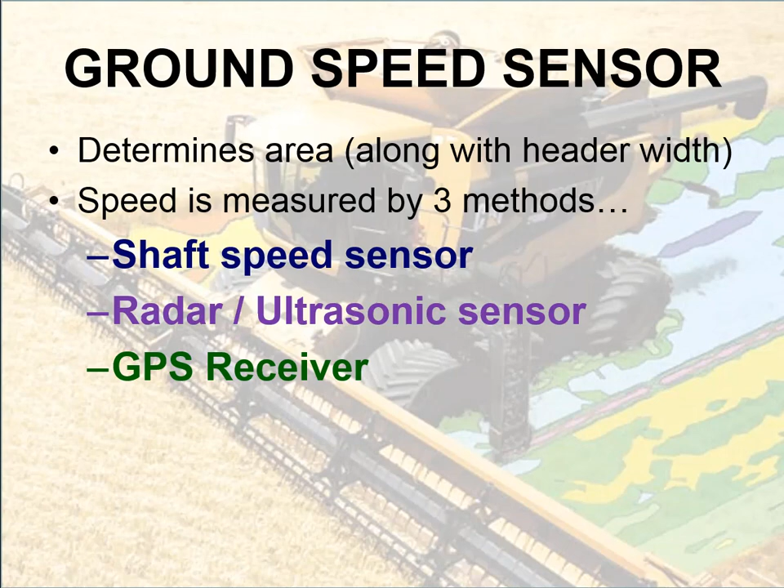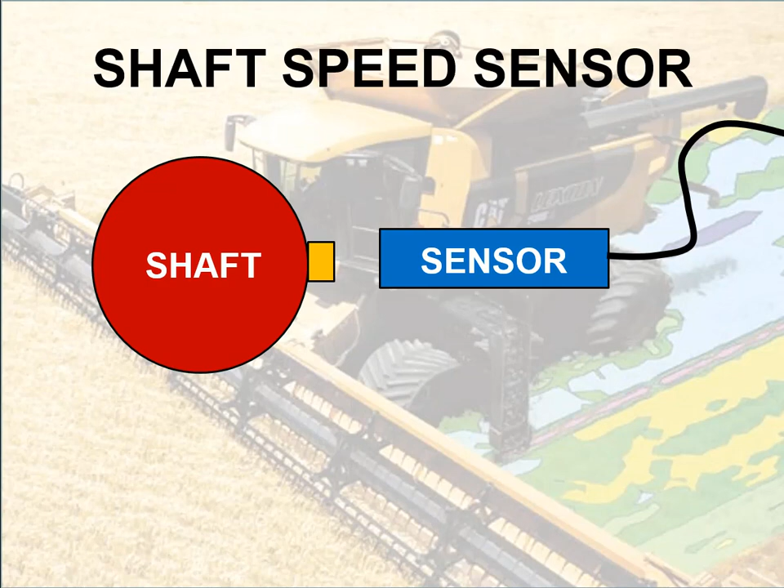And what happens is when that shaft spins and that magnet spins, as I put it into animation here, as that shaft spins around and it takes that magnet around, as soon as the magnet comes back near that sensor, it picks up the signal of the magnet and counts it. So what we're recording here is how many times that magnet will go past the sensor in a given amount of time period. And so it calculates the speed from that. So that's what a shaft speed sensor is.

The problem with it is it's not 100% accurate. The reason being is if you look at a lot of agricultural equipment these days, all the power that we put in the tires to drive forward, it's not 100% efficient. We have this thing called wheel slippage. In fact, a lot of tractors today, if you look in the cab, there's usually a gauge or something that's telling us how much wheel slippage we have. So the shaft speed sensor may think that we've moved 10 feet when in reality maybe we only moved 8 feet because there was an additional 2 feet of tire spinning going on in that time period. So that's one reason.

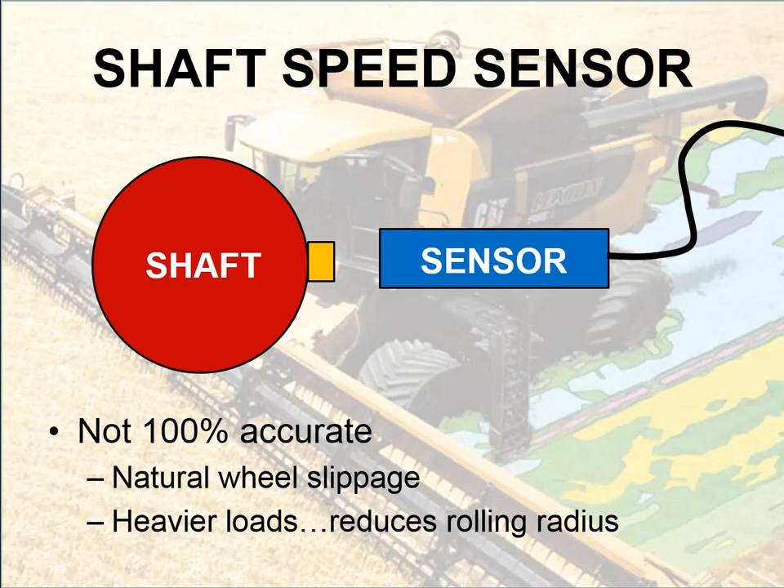Another reason is when you think about a combine, we have combines now that can have a 300 bushel grain tank on them. Well, when that combine is sitting empty versus 300 bushels of grain in it, you're talking a big difference in weight. So as we add more grain into that grain tank, that's going to give us a heavier load, which is going to put more pressure on the tire. That tire is going to have a tendency to squat a little bit, so it's going to reduce that rolling radius. So once again, it's not going to be 100% making a complete round revolution, so it's going to give us an inaccurate speed reading. So in terms of yield monitoring, a lot of older systems, this is what they utilize, and you could tap into it if you wanted to, but you're not going to get a really good speed reading with it.

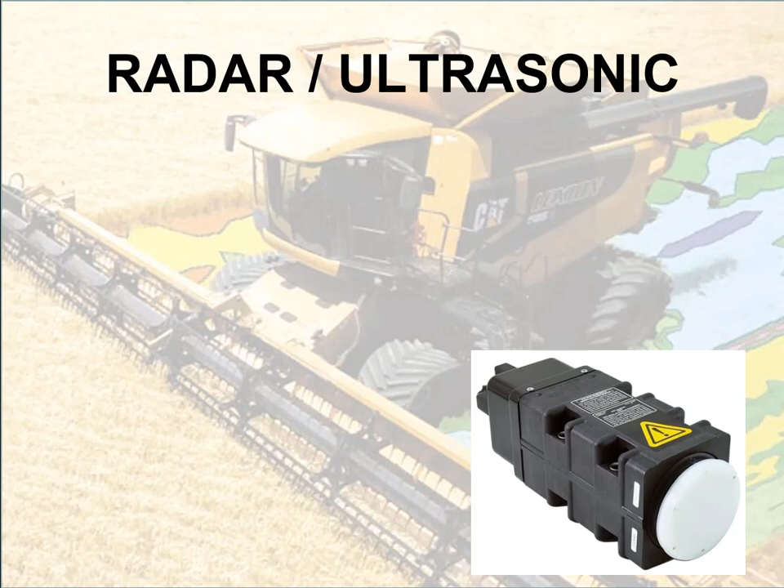Another thing that we've seen and we're able to use is a radar unit or an ultrasonic gun. These things are more accurate than a shaft sensor. It's like a radar unit that a typical law enforcement or police or sheriff may have. So basically, it's a gun that's going to send out radio waves at a certain frequency, and it measures how much time and the frequency of that signal coming back, and it equates it into giving us a speed reading.

So the problem with a radar unit is that if we're in some really rough surfaces, and if you look at a cornfield right after the combine's gone through and picked it up with the head, there's a very rough surface there, depending on where that radar gun is at. So those rough surfaces could alter the frequency and the timing of the signal coming out of the gun and coming back into it.

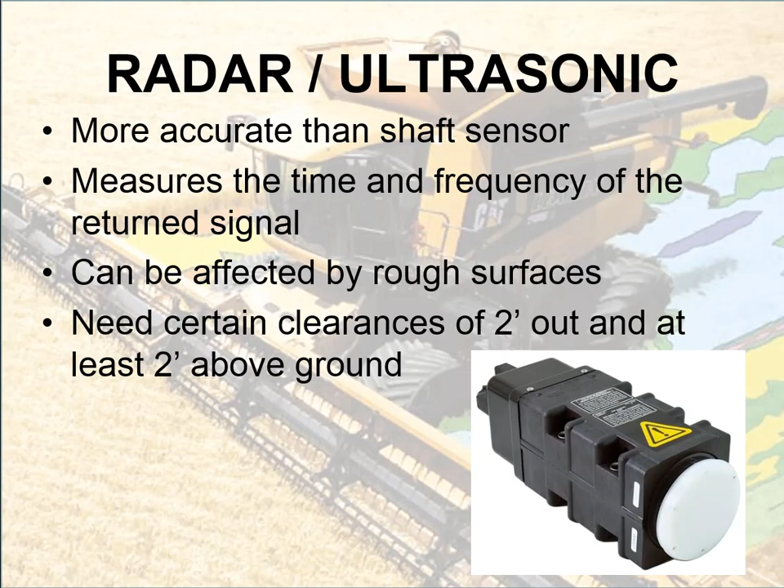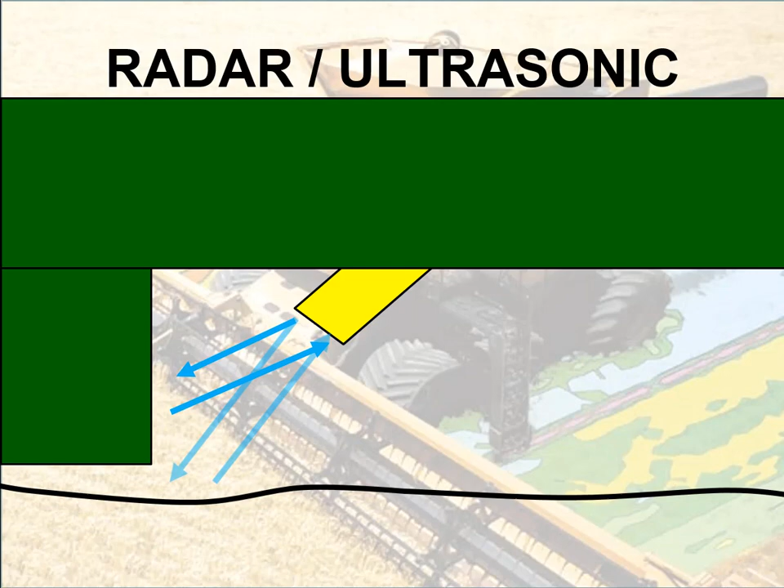We had this in our combine. Our first yield monitor that I had in our combine used a radar gun. And we had the radar gun mounted off the front drive unit, basically underneath the feeder house. We noticed when we got into soybeans that our speed reading was way off, and there was a lot of fluctuations. It wasn't until we got underneath there and measured it that we found we didn't have enough clearance in front of it, so it was picking up scattered signals from the back of the feeder house, because that feeder house ran a lot lower in soybeans than it does in corn. So once again, these are good. It's a lot better than having nothing, but it does have an effect if you don't have it mounted correctly.

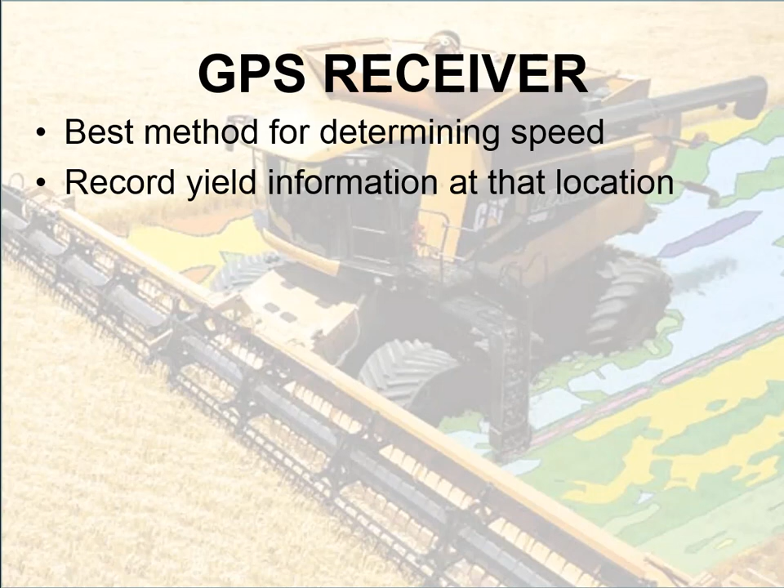Our third type, this is our best method for determining speed, is using a good GPS receiver. And the best part about it too is, since I have that GPS and I'm using it for speed, I'm also going to be able to record my yield information at that location. So it's going to go along and say, yep, here were your coordinates. The combine's going to say, at these coordinates, this is what I was picking up from the moisture sensor, this is what I was picking up from the grain flow sensor, and let's go ahead and start making the yield map. So this is the best method we have, and there's additional benefits from utilizing this.

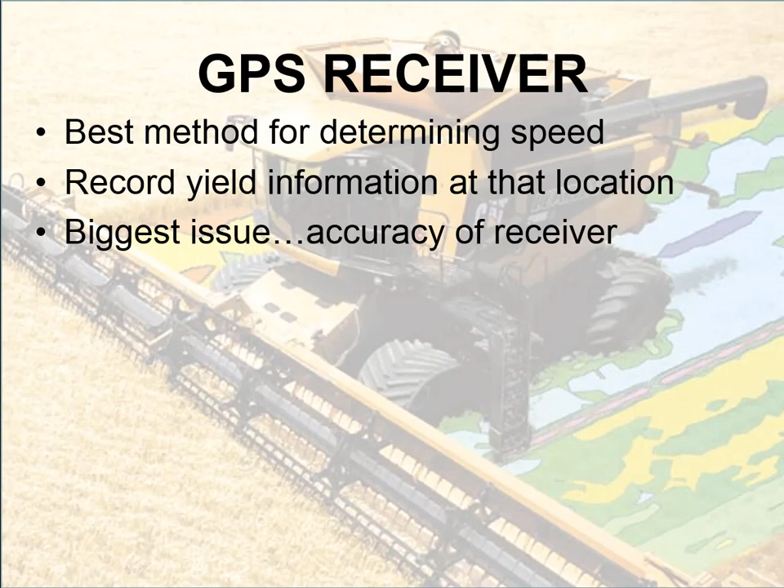The biggest issue we have to worry about with a GPS receiver for determining our speed is the accuracy of the receiver. If you go back to our unit 2, when we got into the basic GPS systems that are out there, those that didn't have that differential signal, we had the capabilities of having those things off by 2 to 3 meters, 6 to 9 feet. If you have a GPS that is not that accurate, 6 to 9 feet accuracy, you can run the calculations, that gives us a difference of about 5 to 6 miles an hour. So that's a pretty big variation if we're using a very low end GPS signal that does not have any differential correction.

The other thing you think about is, the faster you go, the more variance we can see in speed, especially with some of those older receivers, or those that don't process as fast. So once again, my location may be at this location, but the GPS may think that I'm 5 or 6 feet away, or even further out in some cases. And so that's not going to give us a really accurate yield map.

So one of the other things we want to look at with that GPS is what we call the Hertz rating. Remember back from that unit, the Hertz is how many satellite signals it can process in a given second. So the more Hertz we have, the more signals we're processing in a given second, so a little bit better positioning. So a 10 Hertz receiver is going to be better than a 5 Hertz, which is going to be better than the 1 Hertz receivers. Something to think about.

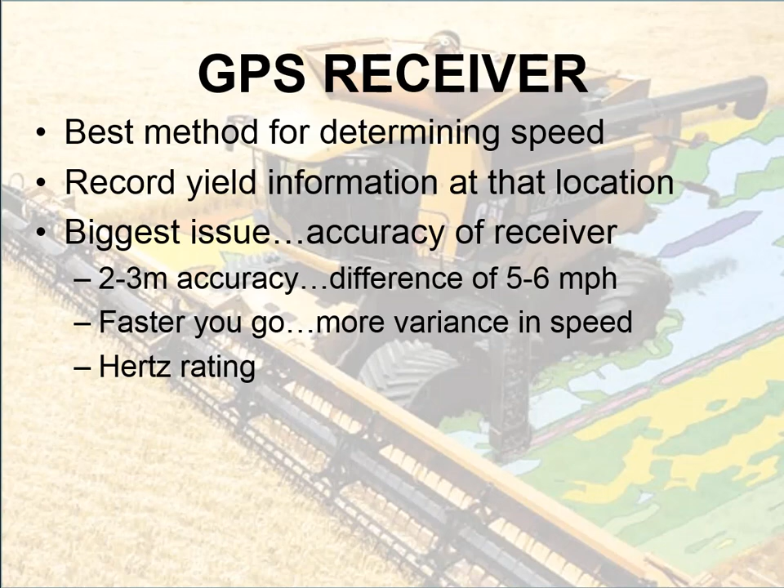Okay, our last vital component we've got to have is what's called a header position sensor. And basically this is a sensor that's going to tell us when the head is up and when the head is down, and when we need to start recording data and information. So it is automatic.

And so what we want to do is be able to say that when we raise the head up, so we get to the end of the field, we pick up the head to turn around and drop it back in to pick up our next set of rows. When that head raises up, I want the system to stop recording. I don't want to be collecting any data.

Vice versa, when I turn around and I drop that head back down, I want it to be able to start collecting data. Now, if we didn't have this header position switch sensor, then it would be up to the operator to basically hit the button on the screen, or to say start recording, stop recording, start recording, stop recording. I've done that in a few other operations, not with harvesting, but a few others. But a lot of times you forget to hit that button to turn it on or to turn it off. So we need something automatic, and that's why we have this.

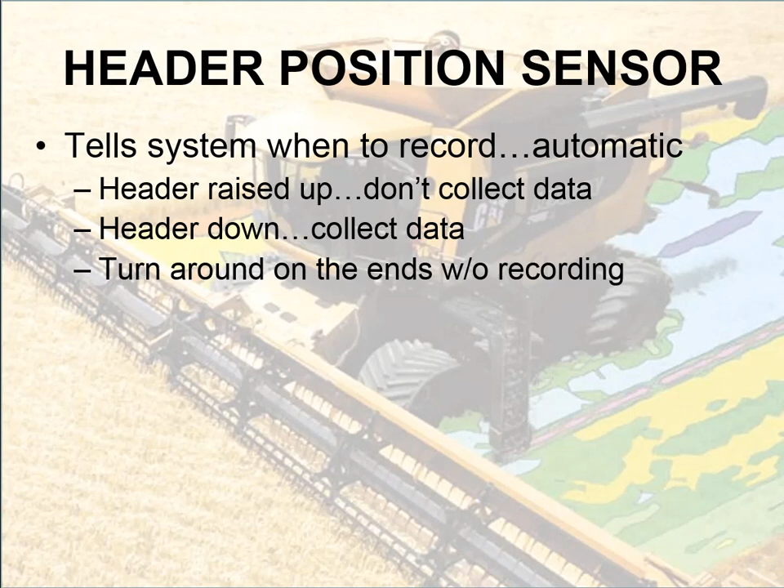Most typical systems, a lot of the older combine systems out there, typically what you have is a spring-mounted arm that kind of sits up underneath the cab, and to that there's a spring with a chain attached down to the feeder house. So as you drop the feeder house, that's going to drop, but the sensor is going to stay fixed to the cab. So when we stretch that chain out, pull on the spring, it's going to activate the sensor and say start recording. So newer models, they have that built in from the factory. So in newer systems, all you have to do is just tee into or tap into that cable into that sensor and feed that into your display system.

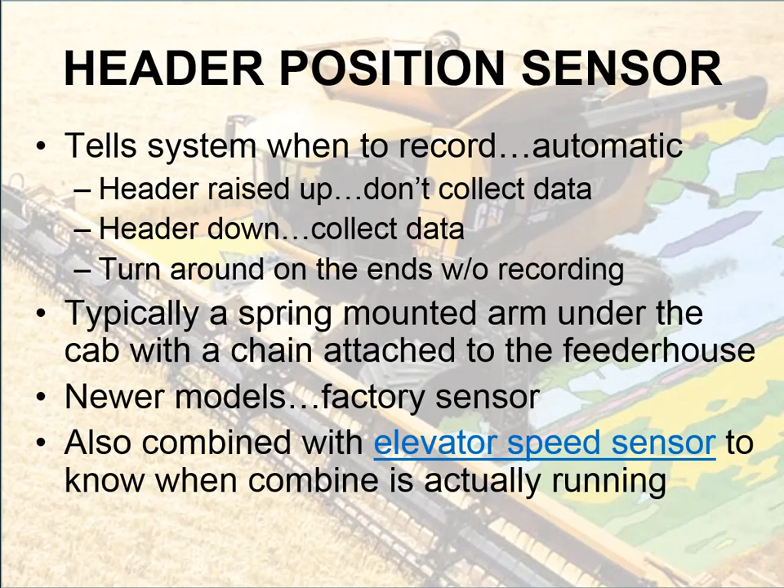So the other thing that we see a lot now these days is that we've also kind of combined it with an elevator speed sensor. A lot of combines on that clean grain elevator, there's a speed sensor there. That just lets us know that it's running, and if it quits, then we know something's going on. But we've also tapped into that, so that way we know when the combine is actually running and we can record. So a scenario here would be prior to that in an older combine when we had yield monitoring, we didn't have that elevator speed sensor and we weren't tapped into that.

So my dad would be combining, he'd lift the head up, it would stop recording. But at the end of the day, he'd come up into the yard and he'd go to park the combine, and of course he always puts the head down because he doesn't want any pressure on the hydraulics underneath the head. So he would always drop it down, but if he still had the system turned on, well, it would start recording, and it would think, hey, you put the head down, you want me to record. Even though the combine's not running, so it's recording 0 yield. And so at the end of the year, when I download the data, I always have to go back in there and delete those out or fix those.

Now since we've also tapped into the elevator speed sensor, most systems right now are not going to record until that elevator speed sensor is actually producing a certain speed, typically 350 RPMs or higher. It's not gonna record unless it hits that mark. So it kind of helps out with that. So that way, at the end of the day, if you go to drop the head, but the rest of the combine isn't running, it's not going to record.

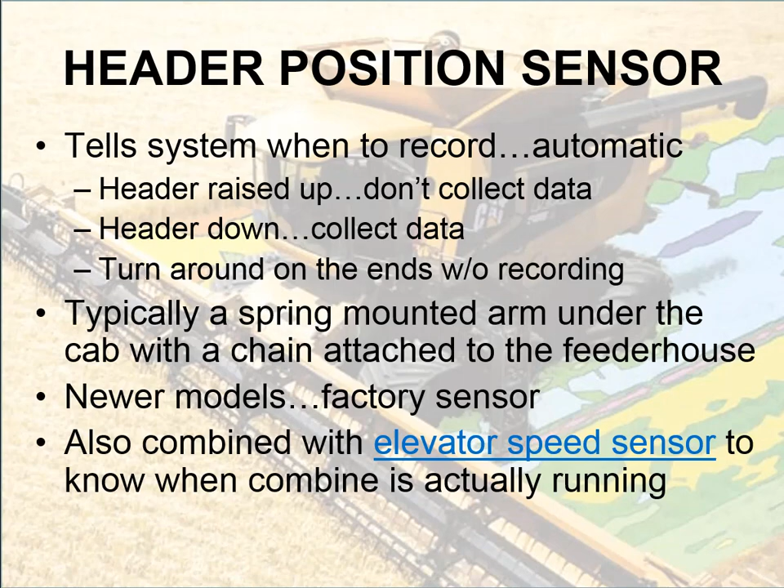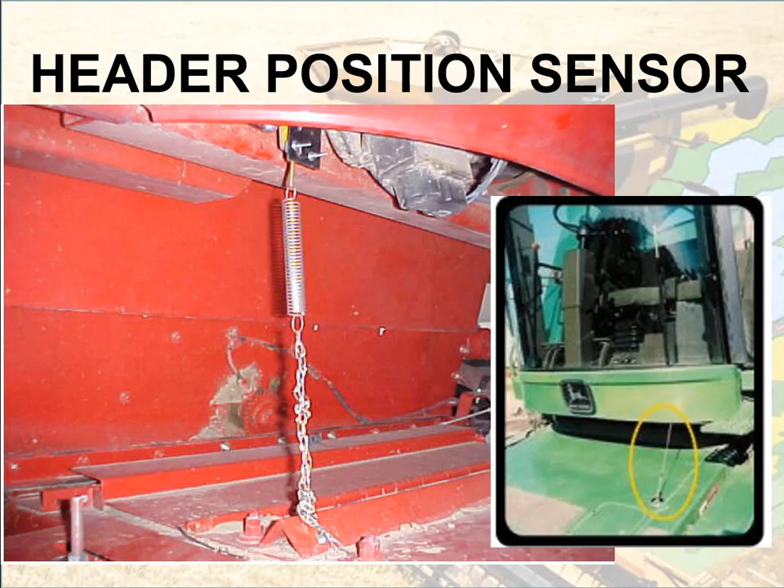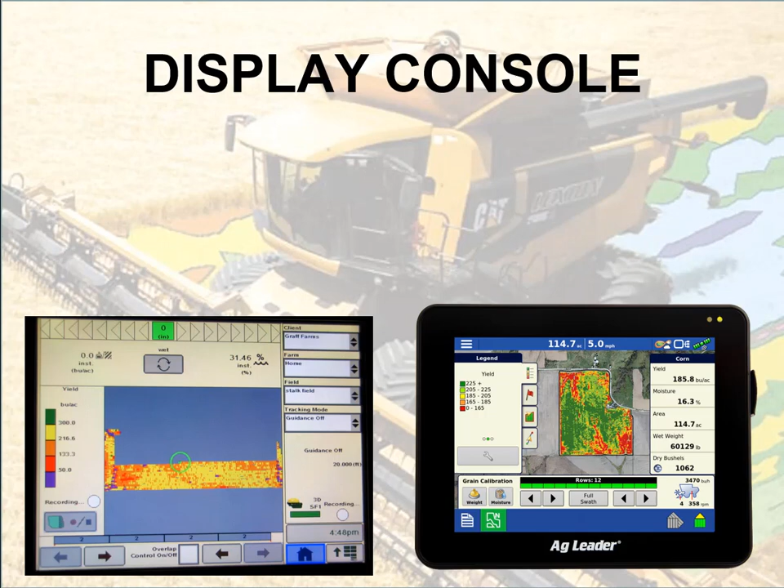The last thing we got to have is, well, we need something in the cab to know what's going on. So we have to have that good old display console, what we talked about in the last unit. So obviously that display is going to be mounted in the cab. That's kind of a no-brainer. And as we learned in the last lesson, this is where all of the data is coming into. It's collecting and gathering all that data, calculating what's being fed in from all the sensors, what's being fed in from the modules.

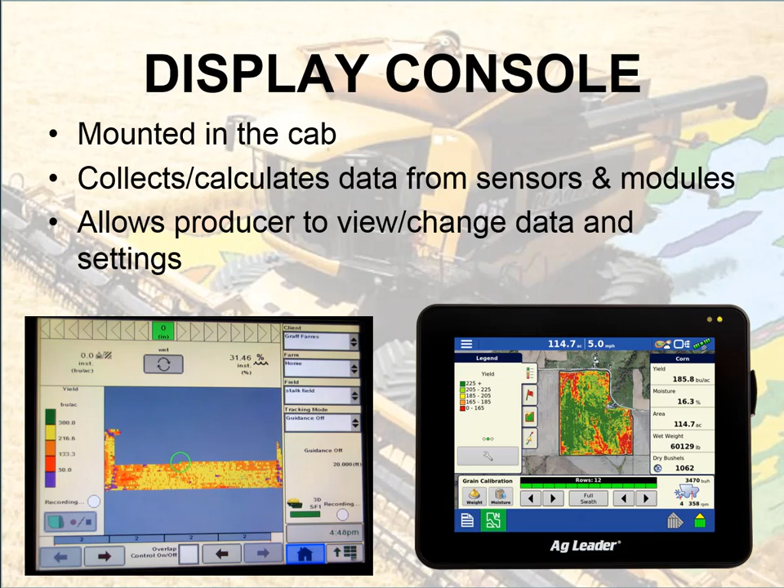And it's also allowing us to see what's going on, change some of the settings in there, set things up, do our calibrations and all that sort of information. So kind of a vital piece that we got to have. So that's in terms of basic components. So we'll kind of switch over to the other side, to the calibration.

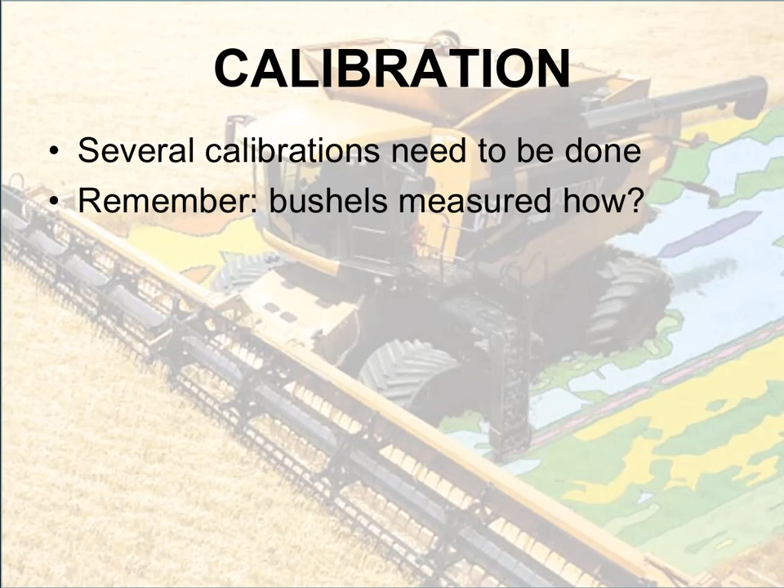So there are several calibrations that need to be done, and the reason for that is, if you remember back to that grain flow sensor, we have grain hitting that impact plate, and so we have to take that signal and turn it into bushels. So we have to hit that mass, and we have to have a way so that the system knows whatever amount hits it, it can equate it to bushels. So there's a lot of calibrations that need to be done.

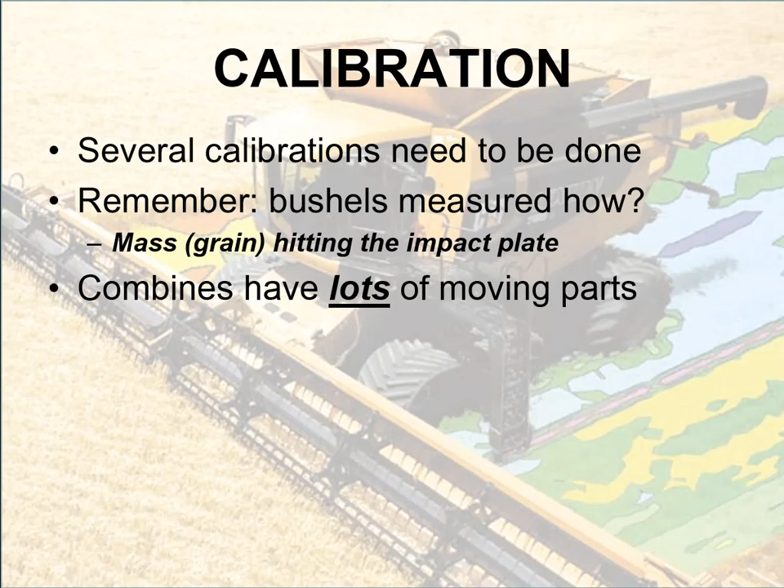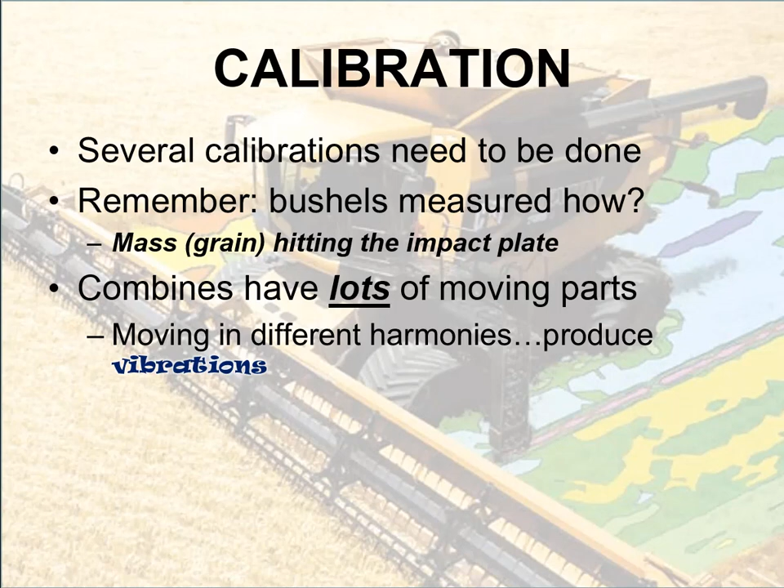One of the key ones that we're going to look at, and think about this, is that combines have lots of moving parts. When you fire up that combine and engage it, we have to run the threshing unit underneath. There may be some of the separation stuff further back, the fans, the elevator to get up to the clean grain tank. If we're running the unload auger, then we go to start up the head. So there's lots of moving parts, and all those parts move in different harmonies. And when you start combining different harmonies, that's what equates to vibration.

And if those vibrations are going on, they're going to be picked up by that force plate on that grain flow sensor. So that plate is going to interpret those vibrations as, oh, something's hitting me and I need to record that yield. So that plate is going to record what it thinks is yield, when the reality is I still don't have anything going through the combine. I'm just running the combine. I'm not even harvesting grain. So we have to factor those vibrations of the combine out. We basically have to nullify them.

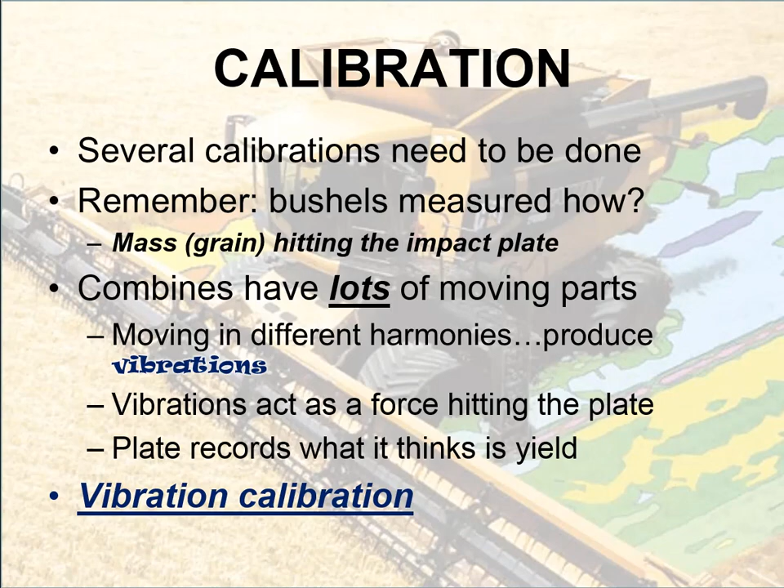So what we do is what's called a vibration calibration. At the beginning of every crop, when we go to start combining, say, soybeans, we're going to do a vibration calibration, and we're going to do this every year. For every crop, we're going to power up the combine, run it full bore as if we're combining, but we're just not going to combine. Then we go into here and do the vibration calibration, and it's basically recording and canceling out those vibrations so that when we do get in the field, it won't utilize them, and what the plate records is what's actually hitting it.

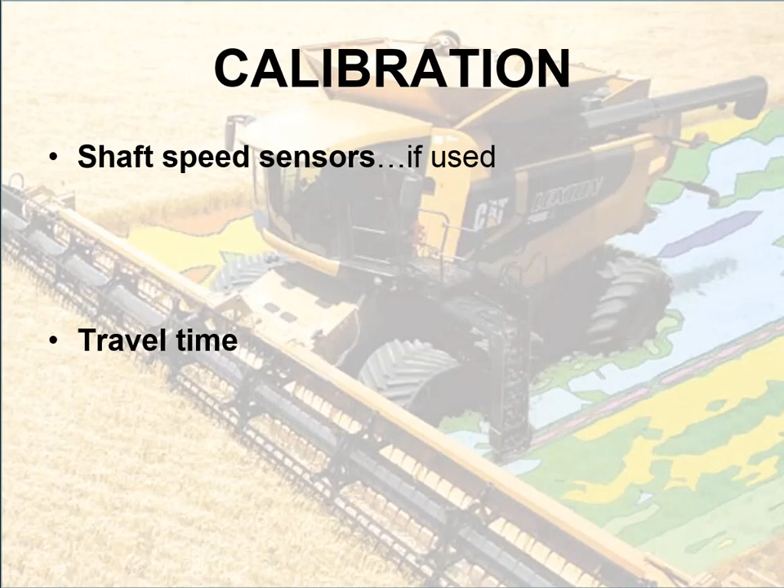Alright, next couple calibrations we need to take a look at that are fairly important. One of those is the shaft speed sensor, and that is only if it's going to be used, if we don't have the GPS or don't have a radar unit. The shaft speed sensors don't know their distance or their speed, so typically we have to calibrate that, so those sensors will know what that distance is, and from that it can compute speed. Typically you measure off a known distance, and what I have seen has been 700 feet. I've seen 800 foot. I've also seen 1,000 foot.

You measure off a known distance like that, 1,000 feet, take your combine to the starting flag, and then you drive that distance. When you get done, you hit stop, and the system will say, if that was 1,000 feet, I recorded 890. So then it does the calculation and calibrates it accordingly, so it can calculate the speed a lot better.

So travel time is another one. By travel time, it's not traveling down the road or anything like that. What we're looking at is how long it takes for the grain to go from the front of the combine, when it comes into the head, till it hits that grain flow sensor. It's not right away. It takes some time. So we have to log and record that time, and every combine, every crop will be different. We time that so if we're using a GPS, it'll know what that yield was when it was coming into the head, not when it was hitting the grain flow sensor.

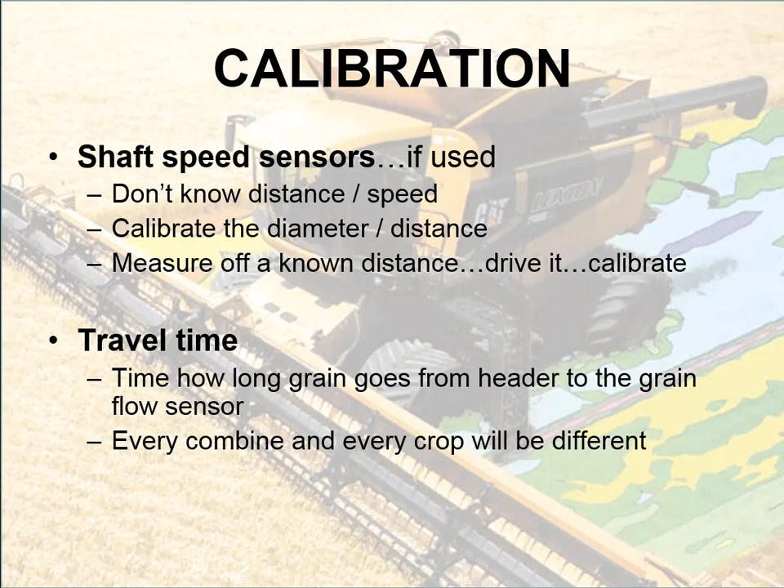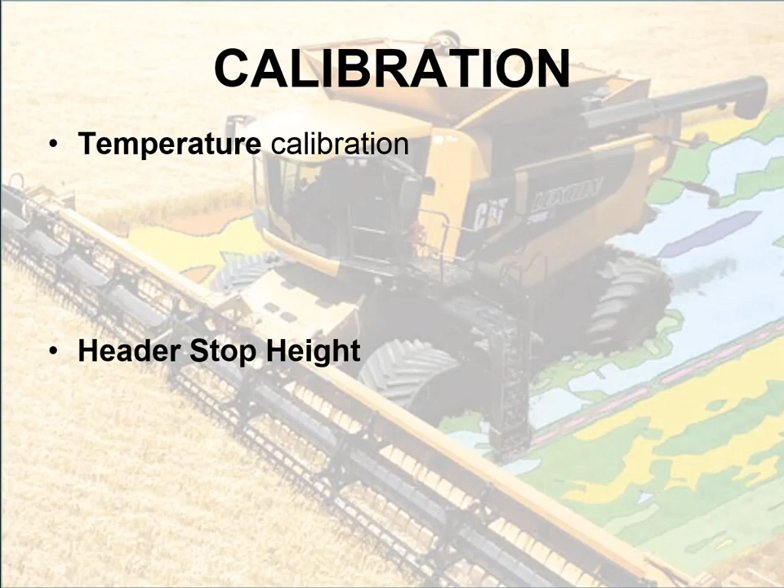Some other calibrations that we have is there is a temperature calibration. The temperature calibration helps give us a better, more accurate moisture reading. As I said, moisture will affect the mass of the grain. Likewise, temperature will have an effect as to what happens to that moisture that's in that grain. So we want to take an accurate temperature reading.

In a lot of displays, you get into the temperature setting, and you could set it. There's like a thermometer on the system, and so the best thing to do is take the combine, go park it in the shade for at least an hour. Let it kind of get acclimated there, take a temperature reading in that shade, and then put that into the system. And once again, it's going to offset it. It's going to calibrate it accordingly.

Or the other suggestion is do it first thing in the morning before the sun gets up and hits the equipment or hits that sensor. So do it first thing in the morning, or park it in the shade for at least an hour.

Another calibration is looking at that header height. We talked about the header height sensor. There's a few things we need to calibrate it. As I mentioned earlier, different heads will run at different heights, so we have to calculate it for different crops, different heads. And sometimes we may have to change it for field conditions as well. In these, typically we have 3 settings.

When we go to calibrate it, we have to calibrate what's the highest that head will go up. So it will tell you raise it all the way to the top. You hit a button and it says, okay, that is what's considered the highest. Then you're going to take that head and set it down as low as it will go, and you can record that. That's going to be the lowest setting when it's down on the ground.

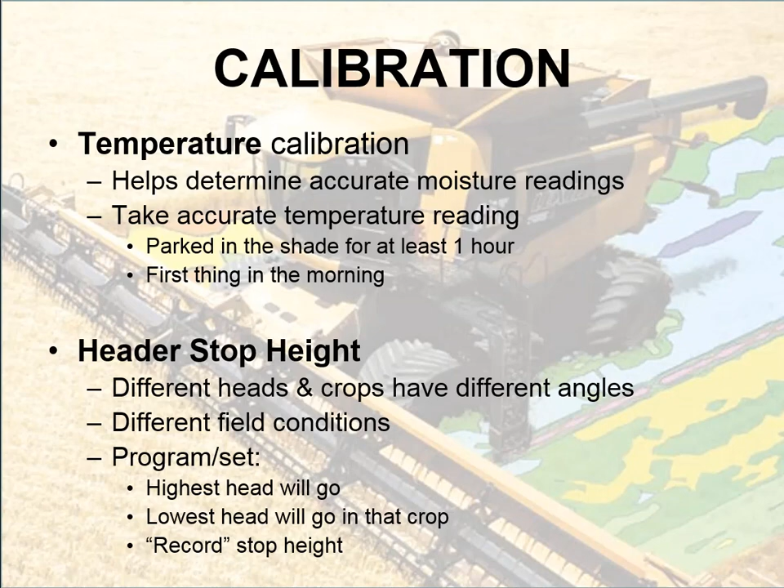This kind of comes back into those field conditions. We have a field that actually has quite a few waterways through it, where we have to pick the head up as we go through it. A couple little small, washout ravine type things. Typically in there, I have to set that record stop height a little bit higher, because sometimes I got to pick the head up a lot higher, even though I don't want to stop recording. So those are things that have some effect on some of the calibration settings we look at.

Okay, one of the biggest calibrations, and this is the biggest one because this is what determines our yields, is what's called load calibration. What we need to do is take a measurement of grain and say, okay, this is how much this grain weighed, so that way the grain flow sensor will know this is how much came through, and we start calculating those bushels.

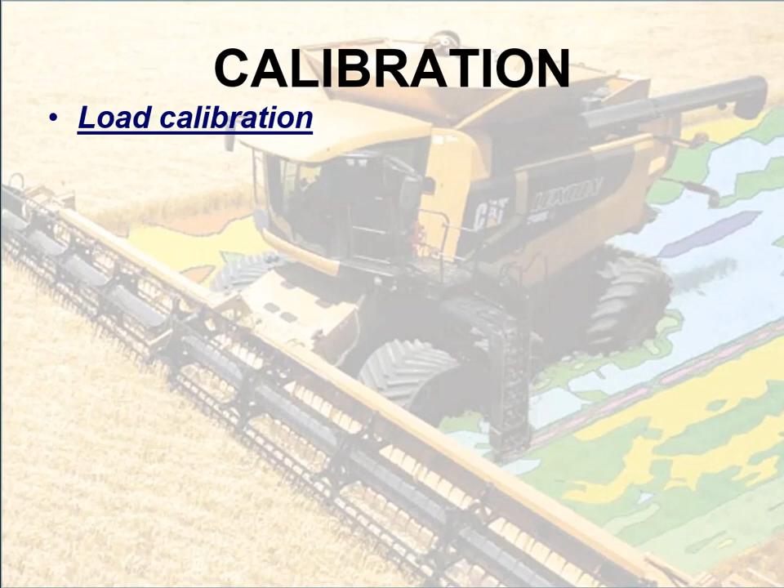So a couple things to know about load calibration. You need to do it at least once per year per crop. And each time you do that, you need to do about 4 to 6 loads. And each one of those loads has to be anywhere from 3,000 to 6,000 pounds.

So as you're going through the field, and you're ready to do a calibration, this is when you're going to have a weigh wagon nearby, or if you have scales on a grain cart. So go out and you combine anywhere from 3,000 to 6,000 pounds. Do that 4 to 6 times.

Now, each load should be something unique and different, from a different area or a different quantity. So maybe one load's going to be at 3,000 pounds, the next one's at a little bit more, 3,500, then a 4,000, 4,500. Make them of a different area. Maybe the first time it's a quarter acre, then it's a half acre or a third acre or an acre, 2 acres, whatever it may be.

You also want to do it at different speeds. So maybe one load you're going to do it at 3 miles an hour, the next one is at 3.5, and maybe one at 2. But you want to do it from a similar variety. So don't start in one variety of corn that has a really great stand, and then your last loads are in a different variety where maybe it wasn't standing so well. So you want to use the same variety, a more uniform type crop.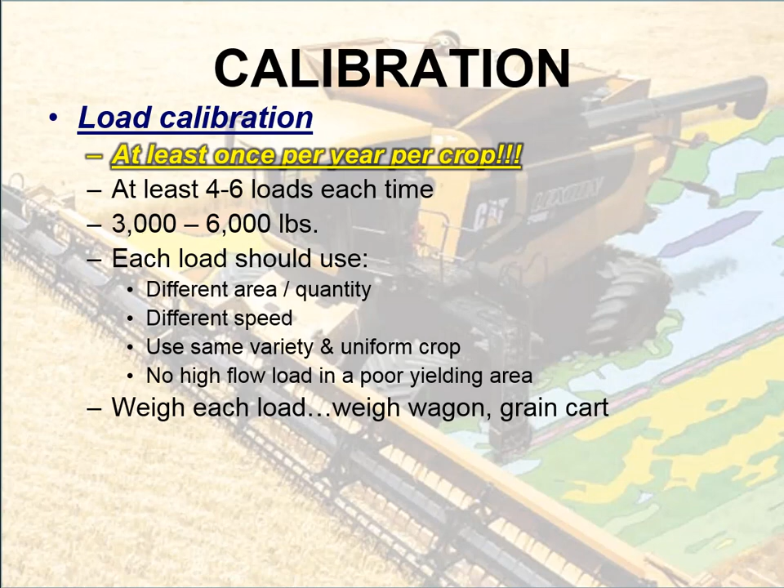So when you take a load out, you combine a load anywhere from 3,000 to 6,000 pounds out of a different area at a different speed. You're going to weigh that load out. Use a weigh wagon. Your local ag service provider or your local seed dealer should have one available. A lot of grain carts have them on. There's been some questions lately about the accuracy of some of those scales, being certified. As long as it's fairly close, you should be good enough.

So you're going to weigh out each one of those loads. Then you're going to go into the display system and enter the correct weight. You say it's a calibration load, and it's going to say, I think I just combined 4,200 pounds. You put it in a weigh wagon and it was 4,400 pounds. So you enter 4,400 pounds, and it's going to do the math and the calculations and factor, and adjust accordingly.

The other thing you want to do at this time is measure your moisture. Take several samples coming out of the grain tank, and don't just take one. Take 3 or 4 and average it. Make sure that your moisture tester is also calibrated. The ones that you get from a local Fleet Farm store are good to begin with, but you have to keep them calibrated, and you can do that with your local ag service provider. Once you do all that, the system's going to do its calculations, create the offsets, and everything should be good.

So, a couple of things to note with load calibration. You don't have to do it at the start of a crop or a season. A lot of the systems these days, it can be done anytime. If you did a calibration mid-season in corn, it's going to go back and make adjustments to all the data that was previously gathered for that crop year. And you can do it numerous times. You don't have to do it one time and forget about it.

Prime example for me is our grain cart has scales on it. So typically about once a week while we're out combining, we'll take a few loads and do some calibration runs. Take the weight off the grain cart, put it in there. We keep doing it. A couple years ago, we constantly did calibration loads throughout the whole season. We got done, everything was in the bin, some of it went to town. It was unfortunately one of those years where we thought we had a potential insurance claim because of some prevented planting acres.

So when the insurance agent came out, he took all the measurements of the bins, what was in the bin, took a look at all the scale tickets of what we had taken to town. He did the calculation, came up with, here's how many bushels he had for corn. My dad mentioned I had a precision ag system, so he took a look at our precision ag data, and he came back afterwards and says, your system was off by 0.05%.

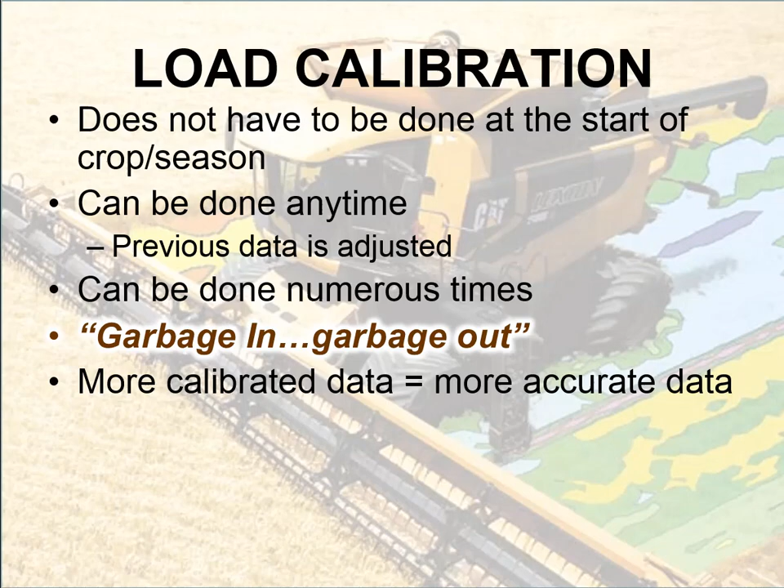It literally is, because if it's not calibrated and it's not taken into account, that information is useless to me later. It's not going to give me those poor areas or those better areas. It's useless. So you want to make sure you calibrate your loads all the time. So if you're going to invest money into a precision ag system, get the most out of it. More calibrated data is going to give you more accurate data. Kind of gave you that example earlier.

So here's kind of an example of what calibration looks like on Ag Leader systems. When you're in there, in the bottom left hand corner of the display, there's a grain calibration, whether it's a weight or a moisture. If you do a weight calibration, you go in there and say, yep, I'm doing a new load. You go and you combine it out. Once you're done, you come back in there, and you can see on the right hand side what it looks like. It says, here's the weight, here is the actual. So you plug in the actual, and then it does its calculations.

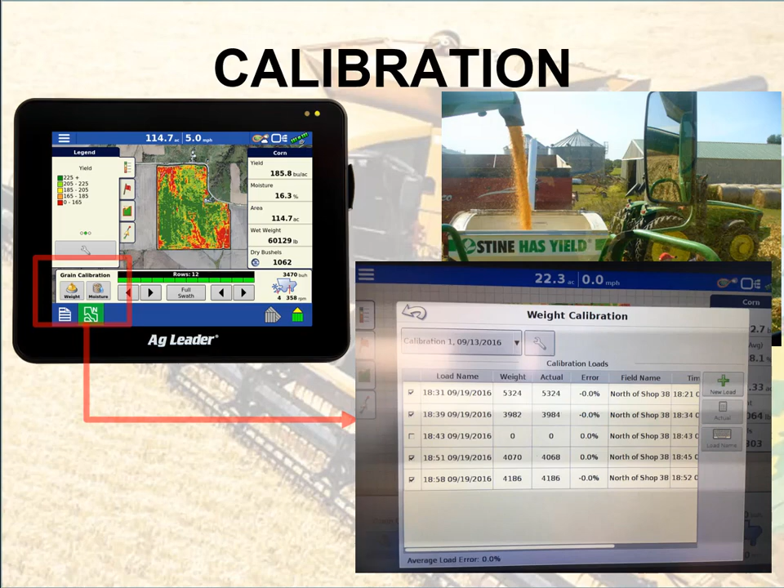The nice thing too with this system is you can see check marks over there. You can actually set which loads you want to utilize as part of your calibration. It kind of helps you dial it in. So if you had one that was way off, maybe there was something there that you didn't realize, like grain was already in the tank, or in the grain cart, or on the scales, you can uncheck that and say, nope, don't use this one. Okay, moving on.

So when to calibrate? When should you do it, or when should some of these certain calibrations take effect? Typically, at the start of the season, two big ones. One is temperature. Like I said, park it in the sun or park it in the shade for an hour, take a temperature reading, plug that into the system. And the other one is, as you're just getting started, see how long it takes for the grain to come through the combine and get up there.

A lot of times when I start seeing it coming into the clean grain tank behind the cab, I'll subtract about a second off of that, because it doesn't take very long in our combine to go from the grain flow sensor into the tank. So I adjust it accordingly there. So that's the start of the season.

And then for every crop, you want to do that vibration calibration. Obviously you want to do those load calibrations, the moisture calibration, as well as set your header height, changes in your header height sensor. So that concludes it for this second video series. In the next one, we're going to look at some areas for potential errors, as well as some general maintenance with yield monitors, and then what's coming down in the future.